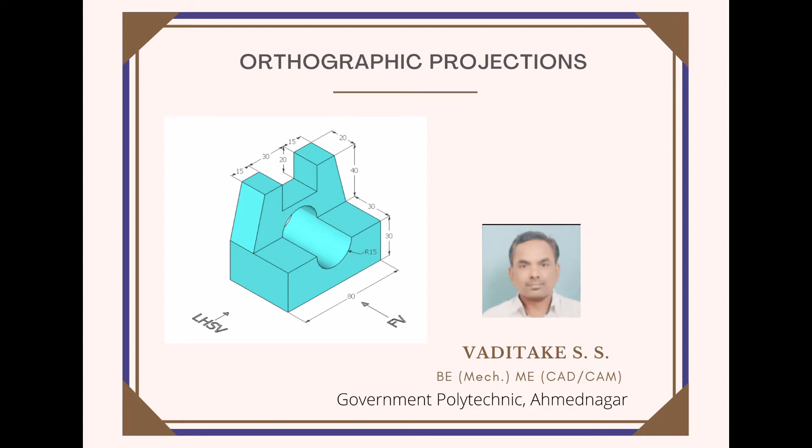Now we learn how to draw orthographic projections by referring to the given 3D pictorial view. First, understand where to place these three views: the front view, exactly below it we have to draw the top view, and to the right side of the front view we have to place the left hand side view.

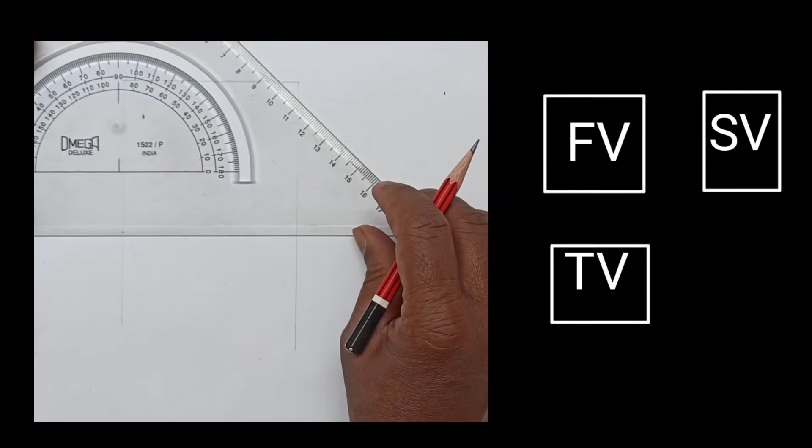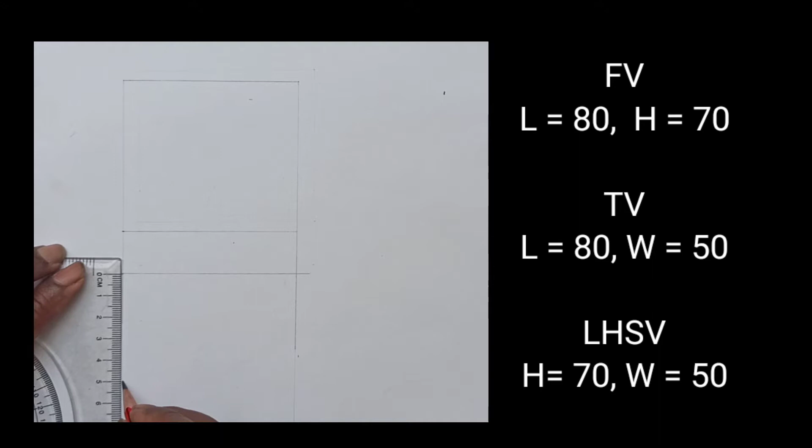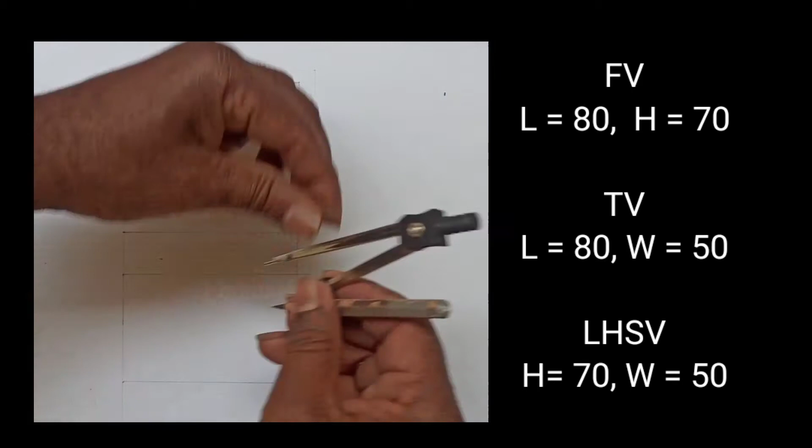By careful observation, trace out the three basic dimensions: length, height, and width. Length is 80 millimeters, height is 70 millimeters, and width is 50 millimeters. Correspondingly, prepare the frame for the front view having length 80 millimeters and height 70 millimeters. Exactly below the frame of the front view, prepare the frame for the top view, of which length is 80 and width is 50.

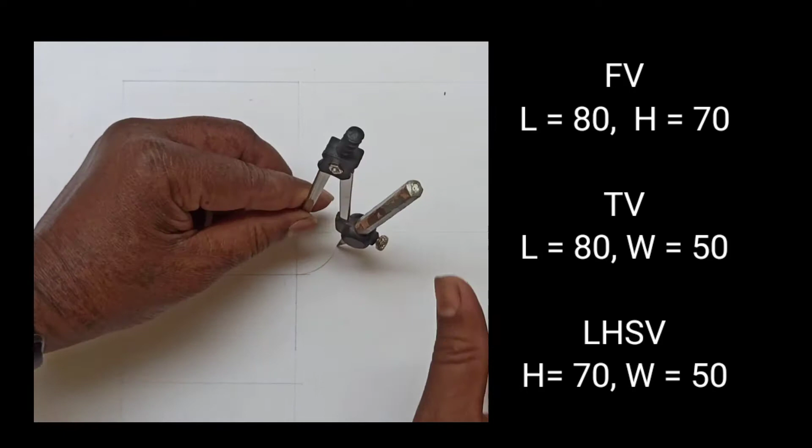Then, exactly to the right side of the front view, prepare the frame for the left hand side view, for which the dimensions required are: height 70 millimeters and width 50 millimeters. By taking the projections from the front view as well as the top view, we can easily draw the frame for the left hand side view.

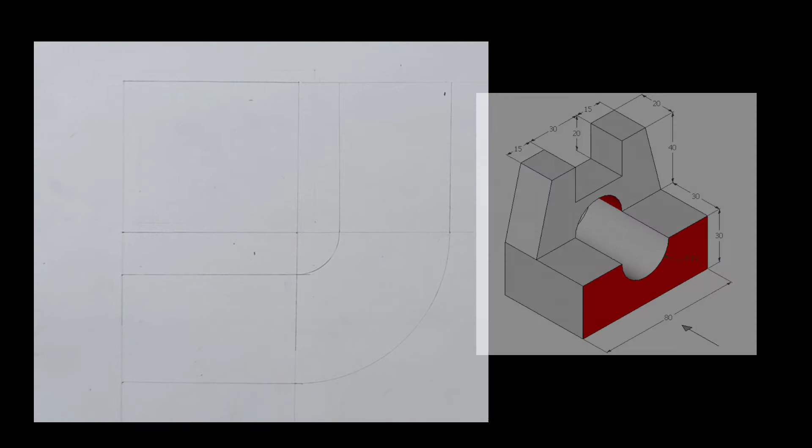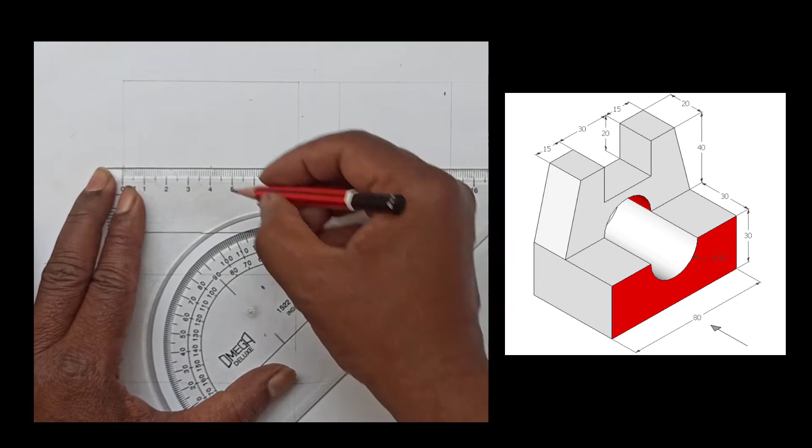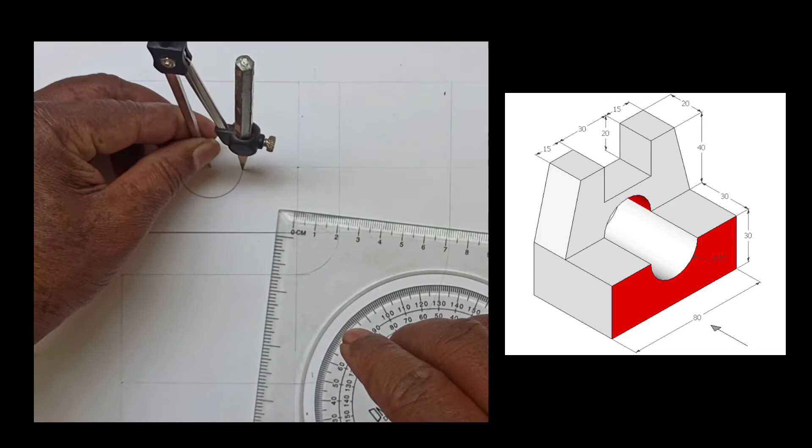Now start to draw the front view. For this, first consider this red color surface, of which the dimensions are: length 80 millimeters and height 30 millimeters. Now we have to draw the semicircle. So locate the center point, take a radius of 15 millimeters in the compass, take the center point and draw a semicircle. Thus the front view of the surface is completed.

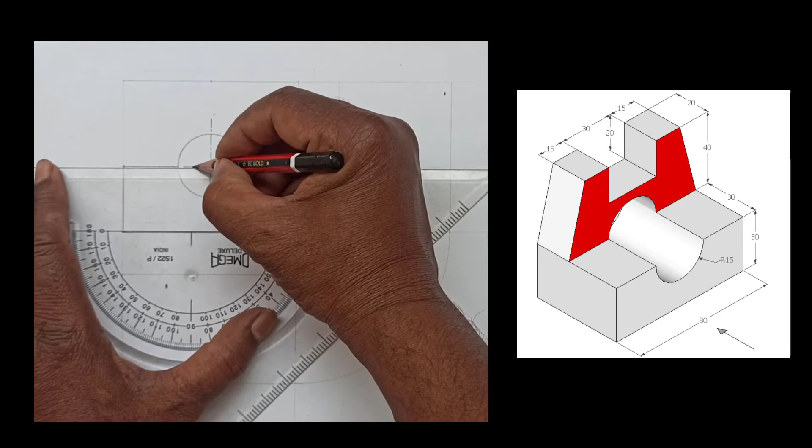Now to draw this surface, draw the semicircle and complete the circle. Draw its center line passing through the center point. Mark the midpoint. Now draw this inclined line. Draw this line of 15 millimeters.

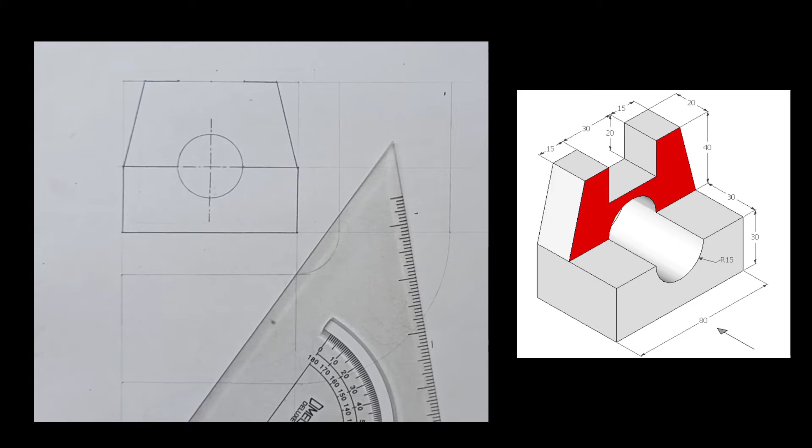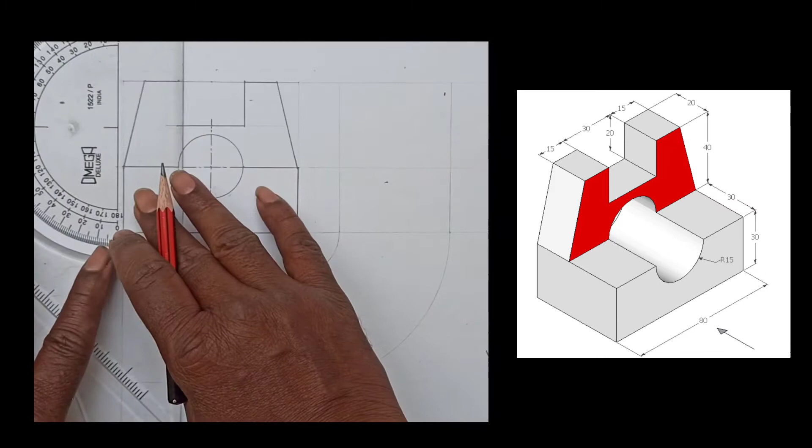The depth of this slot is 20 millimeters. So by using the set square, we will understand how to draw the parallel lines. Draw this parallel line of 20 millimeters, parallel to the length. Now draw this height of 20 millimeters. By using a combination of set squares, we can draw this parallel line. The front view is completed.

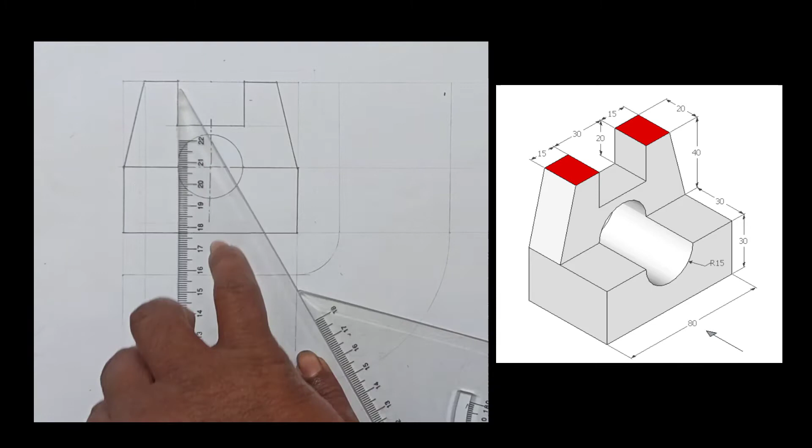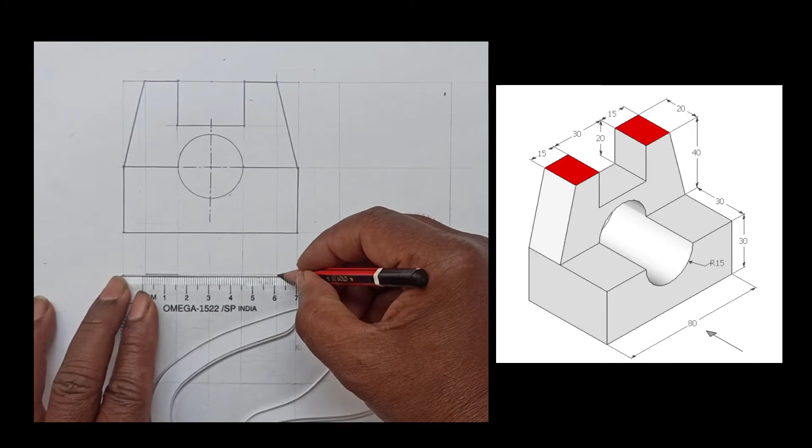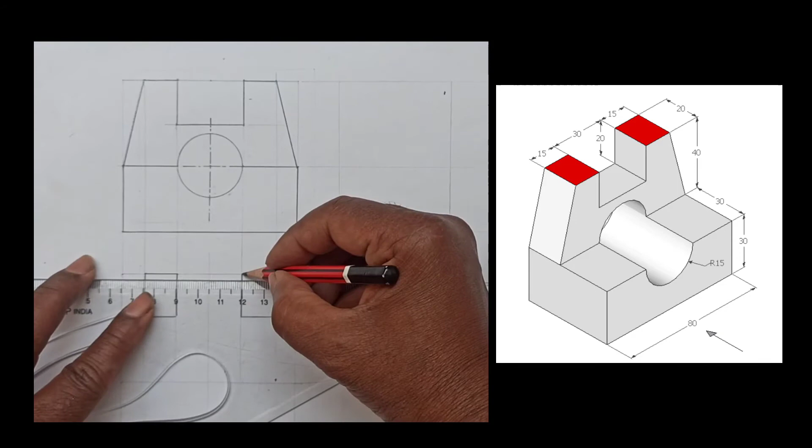Now we have to draw the top view. For this, draw the projections from the front view. For drawing the projections, pick up the vertical lines and extend these lines as the projections in the top view. Now target this red color surface, of which length is 15 millimeters and width is 20 millimeters. So draw these two rectangles having length 15 and width 20 millimeters. For this, take the help of the projections which we have drawn, with reference to the front view.

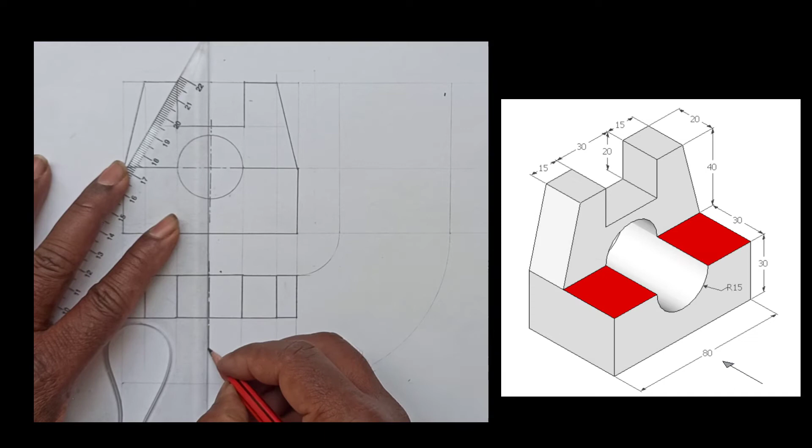Now consider this slot as well as the sloping surfaces. Now again we have to draw these two rectangles, of which width is 30 millimeters and length is 25 millimeters. So draw these two rectangles of 25 length and 30 millimeter width.

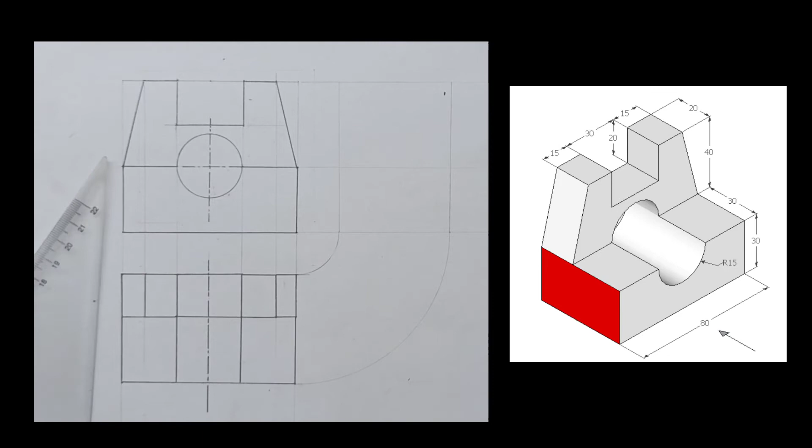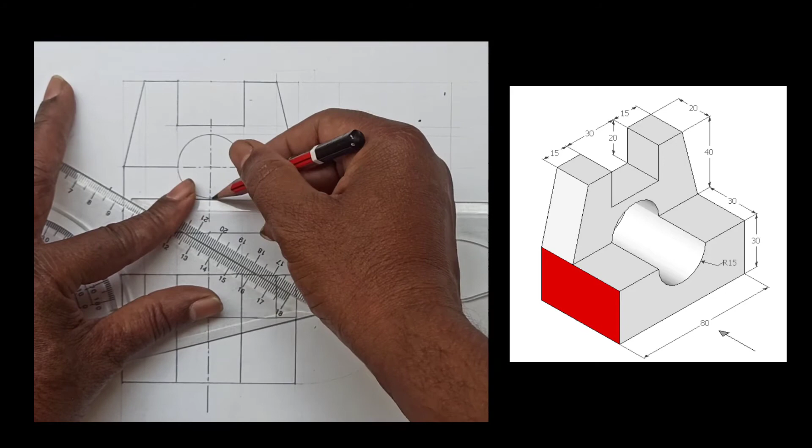Now we have to draw the side view. For this, by using a combination of set squares, we have to draw projections. These projections should be parallel to each other. So just slide the upper set square, which is aligned with another set square, and thus projections are drawn. All these projections must be parallel to each other. Now also draw the projections from the top view. For this, use a compass.

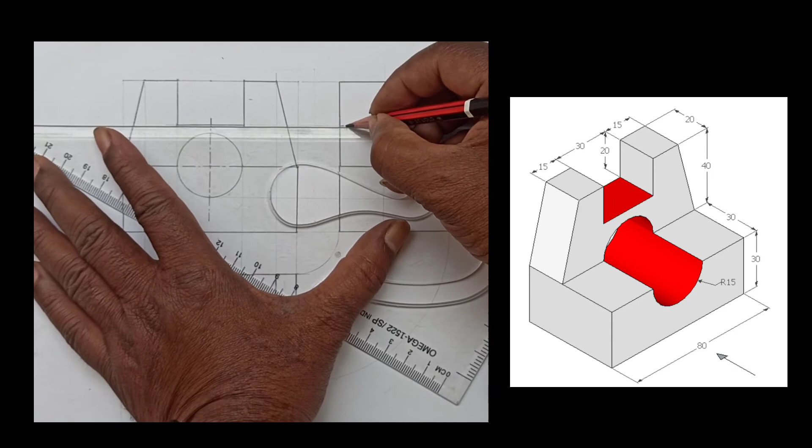Now draw this red color surface, which is an inclined or sloping surface, of which width is 20 millimeters and height is 40 millimeters. Now we have to draw this hidden portion. So draw these dotted lines with reference to the front view. Draw this dotted line, which will indicate the hidden portion.

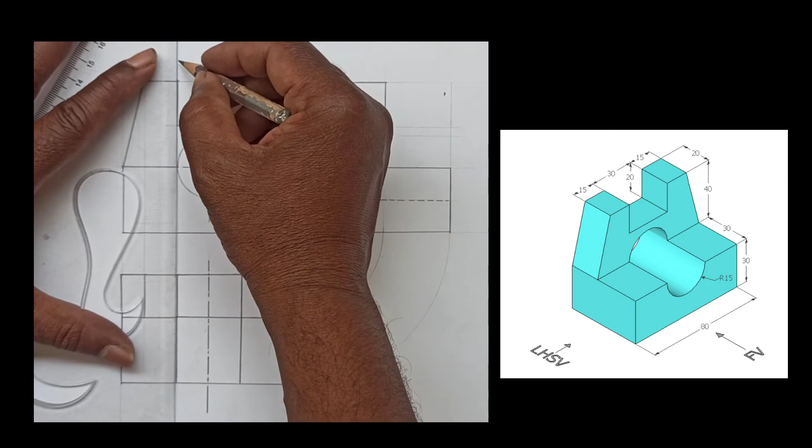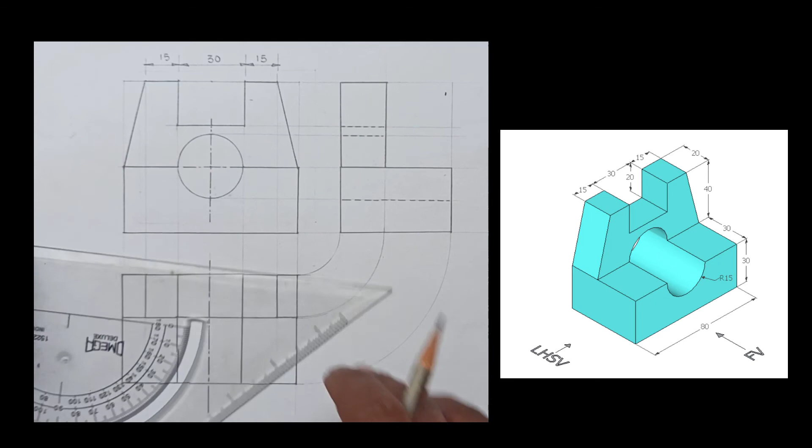Now give the dimensions. The dimensions add value to your drawing. So use neat and systematic dimensioning techniques. Draw the proper size of arrow. All arrows should be of the same length. For horizontal dimensions, put the dimensions above the horizontal line.

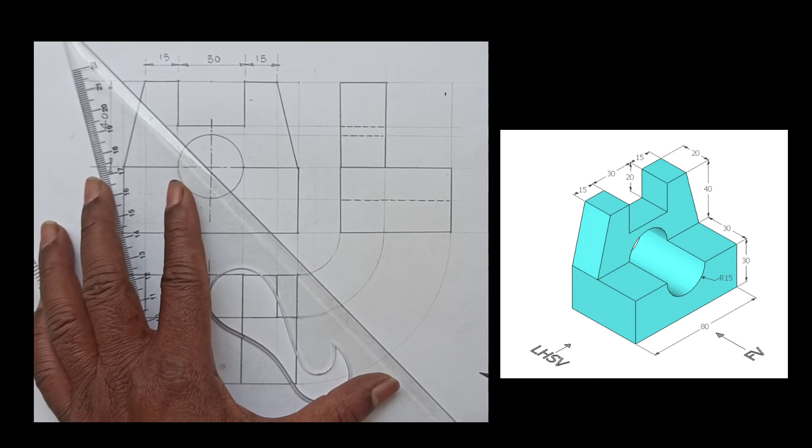Now here we are showing the vertical dimensions. For vertical dimensions, draw the dimension line approximately 8 to 10 millimeters from the visible outline, and place the dimension toward the left side so that it can be read from the right direction. Give the dimension of the circle. So here Ø30 means diameter 30 is indicated.

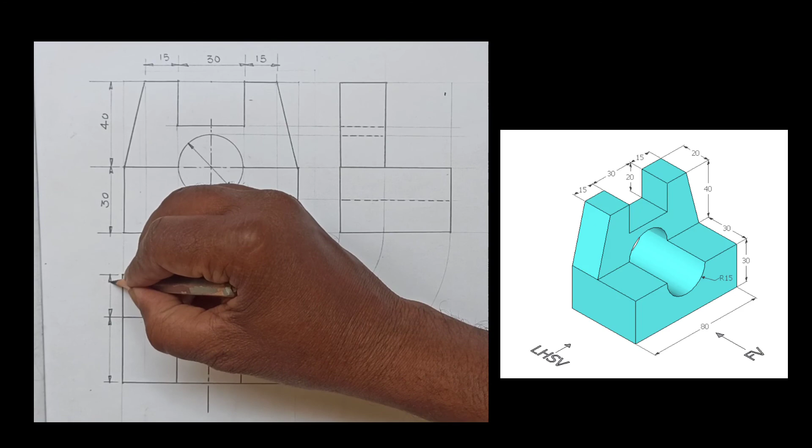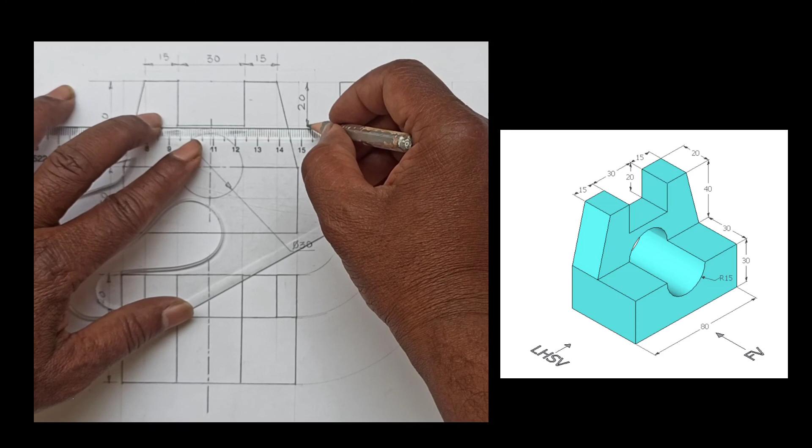So this is a width of 20 and this is 30 millimeters. So all necessary and sufficient dimensions are shown here. Now we have to show the depth of the slot here. So the depth is 20 millimeters. So maintain line work.